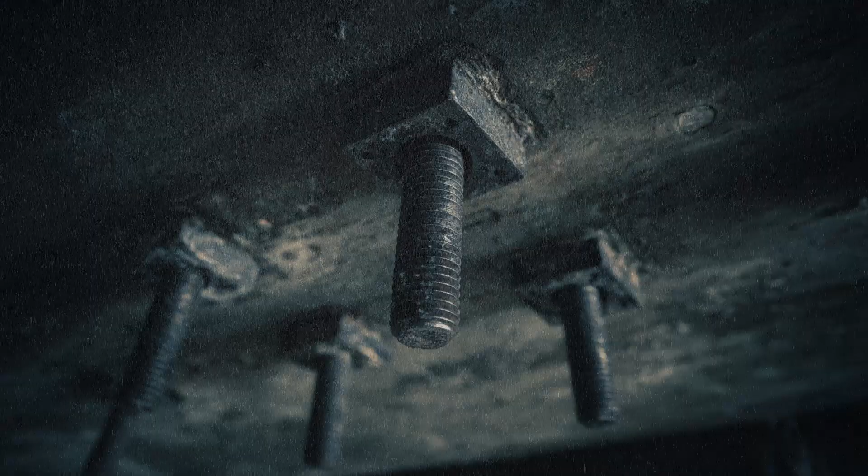On the morning of December 2, 2012, the Sasago Tunnel on Japan's Chuo Expressway was carrying its usual Sunday traffic. Above them hung a ceiling of 270 concrete panels, each weighing 1.2 tons, suspended from the tunnel roof by steel bolts fixed into the concrete with adhesive. 324 tons held in place by chemistry.

The adhesive holding those bolts had not been physically inspected in 12 years. At 8:03 a.m., 138 meters of that ceiling came down. 9 people died. This is the story of 324 tons held up by chemistry, and what happens when the chemistry fails.

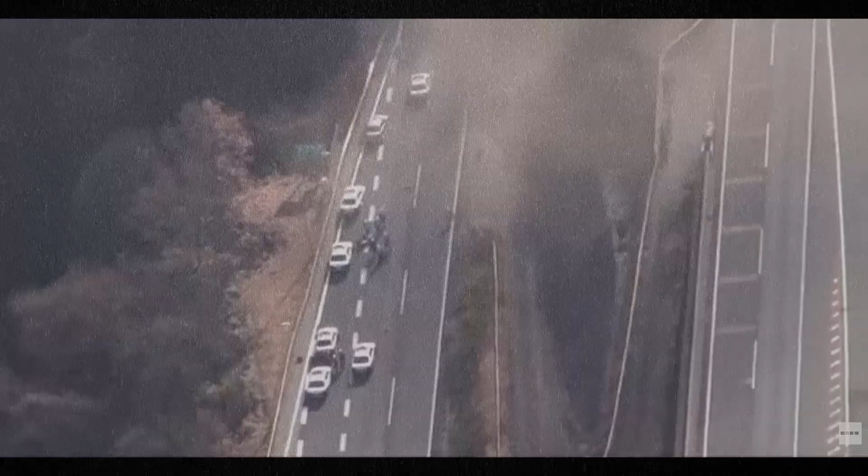This tunnel had a fatal flaw, hiding in plain sight. Let's see how it broke down. The Sasago Tunnel runs for 4.7 kilometers beneath the mountains of Yamanashi Prefecture, west of Tokyo. Opened in 1977, it became one of the most critical links in the Chuo Expressway, the highway connecting the capital to central Japan. On any given day, tens of thousands of vehicles passed through it. It was infrastructure so essential that shutting it down for repairs meant paralysis for Tokyo-bound logistics.

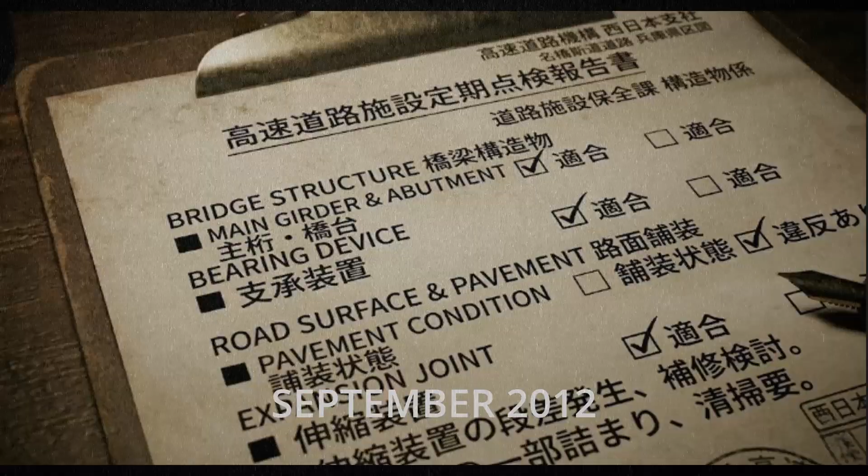The tunnel had passed its most recent detailed inspection just 2 months earlier, in September 2012. Inspectors found no abnormalities. The inspection report was filed, the tunnel remained open, and the adhesive inside the bolt holes continued to dissolve.

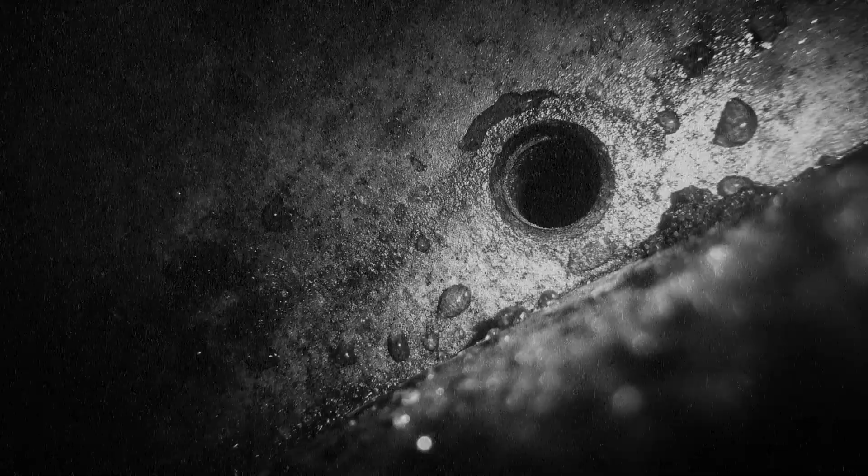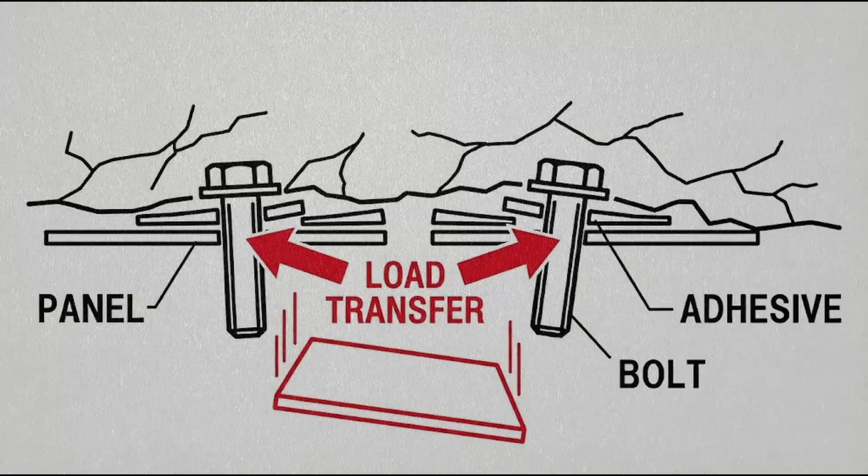At 8:03 a.m. on December 2nd, a single anchor bolt lost its grip on the tunnel roof. The concrete panel it supported, 1.2 tons, dropped 5 meters onto the roadway below. The load that bolt had carried transferred instantly to the neighboring bolts. They were already weakened. They failed. In less than 5 seconds, 270 panels fell.

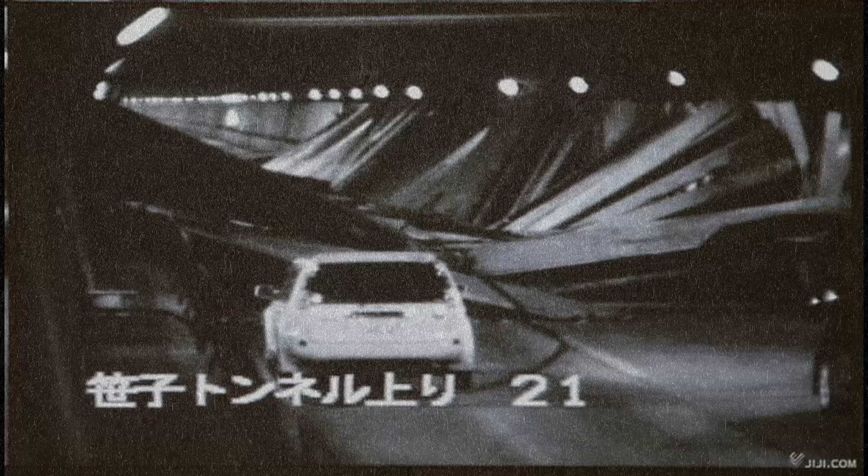138 meters of ceiling became 138 meters of wreckage. 3 vehicles were buried, 1 caught fire. Within 60 seconds, smoke filled the tunnel. But the real question was not what fell. It was why it was still hanging in the first place.

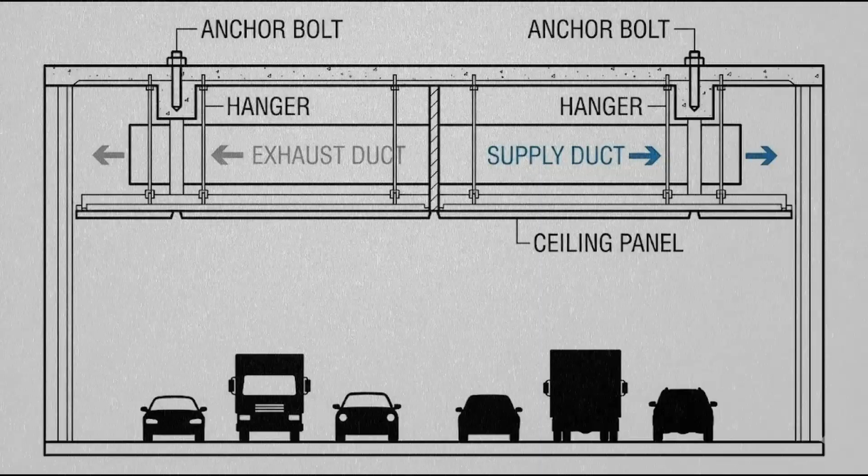The tunnel needed ventilation. Every long tunnel did. In the 1970s, vehicle exhaust standards were far less strict than today, and a 4.7-kilometer tube filled with diesel fumes required a way to move air. The solution was a cross-flow ventilation system, a design that created air ducts by hanging concrete panels from the tunnel ceiling. Clean air flowed through one duct above. Exhaust was pulled through another. It was efficient. It was standard practice. And it required suspending hundreds of tons of concrete overhead permanently.

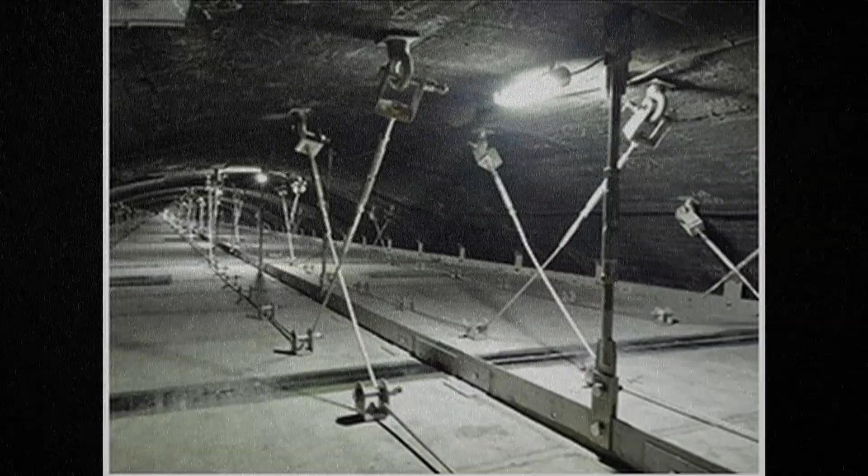The panels were fixed to the tunnel roof by steel bolts. The bolts were anchored into the concrete with a polyester resin adhesive. The design called for each bolt to withstand a pull-out force of 40 kilonewtons. At the time of construction, they did. But polyester resin has a chemical vulnerability. In the presence of moisture, its molecular chains break apart, a process called hydrolysis.

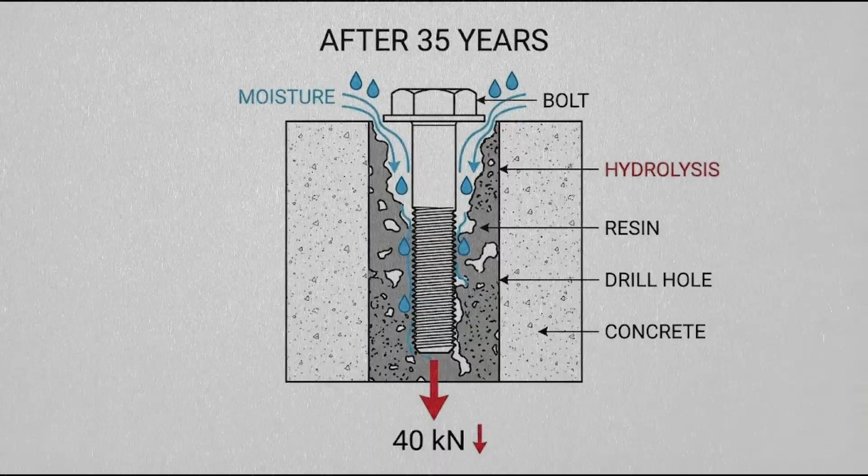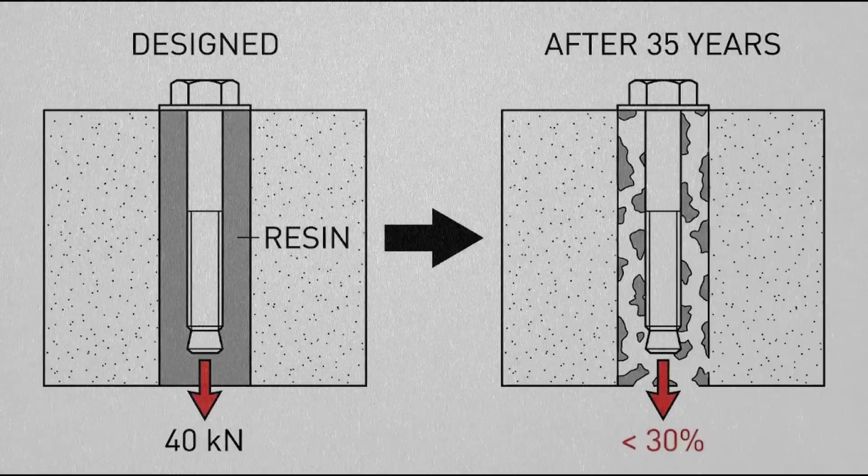The tunnel was a humid environment. Groundwater seeped through the rock above. Condensation formed on every surface. The resin was designed to last. After 35 years, post-accident testing found that some bolts had retained less than 30% of their original holding strength. Some registered 0. They were still in their holes. They were holding nothing. And this was only part of the problem.

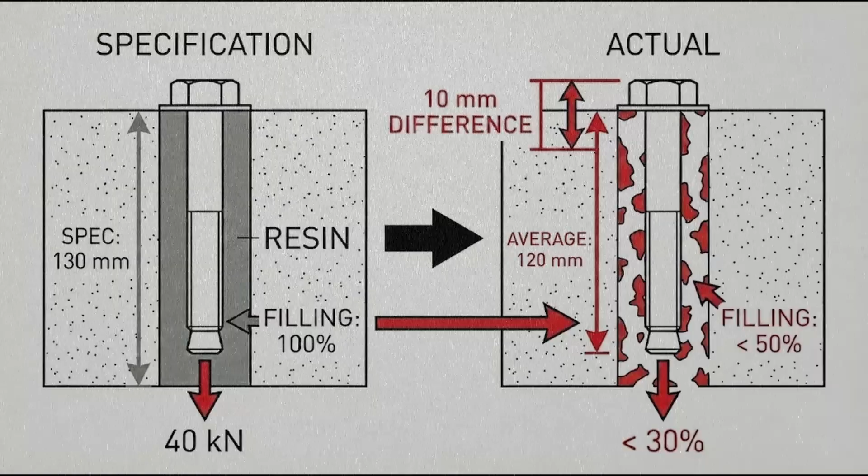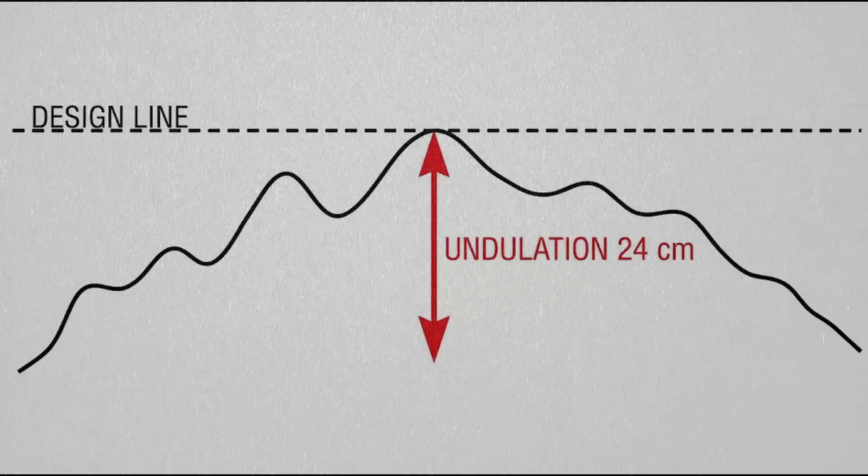The specification called for the adhesive to fill the entire drill hole, 100% coverage. Post-accident core samples revealed fill rates below 50% in some locations. The bolts were embedded to an average depth of 120 millimeters. The specification required 130. The tunnel ceiling was not as smooth as the blueprints assumed. It undulated by as much as 24 centimeters in places, making consistent installation difficult. The designers had trusted the adhesive. The builders had done their best in imperfect conditions. And for 35 years, the structure held.

So the anchor was dying. But a weakened bolt does not, by itself, bring down a ceiling. For that, you need a chain reaction. The ceiling was designed as a continuous structure, panel connected to panel, supported by a shared framework of steel beams hanging from the tunnel roof. There was no redundancy, no secondary support, no failsafe. Engineers call this a single-path structure.

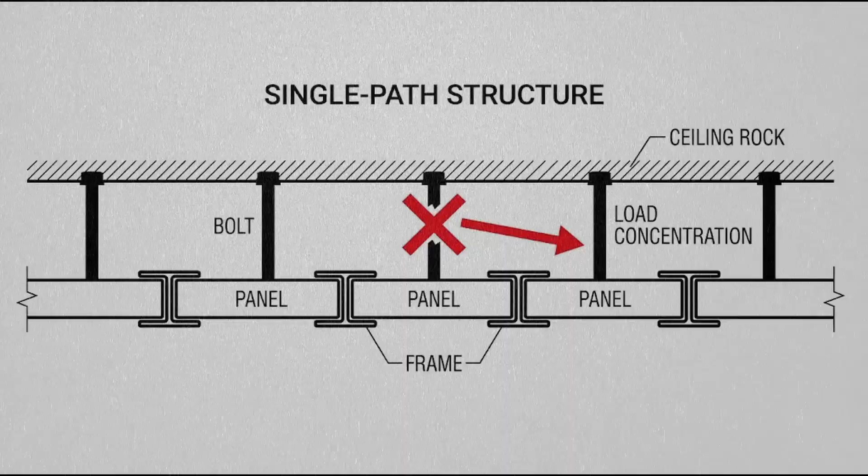If one connection fails, the load does not distribute evenly across the system. It concentrates on the nearest surviving connection. When one bolt pulled free, the load on its neighbor doubled. The safety factor built into the original design was 3, but the adhesive had already lost 70% of its strength. A factor of 3 means nothing when the material can barely hold its own weight.

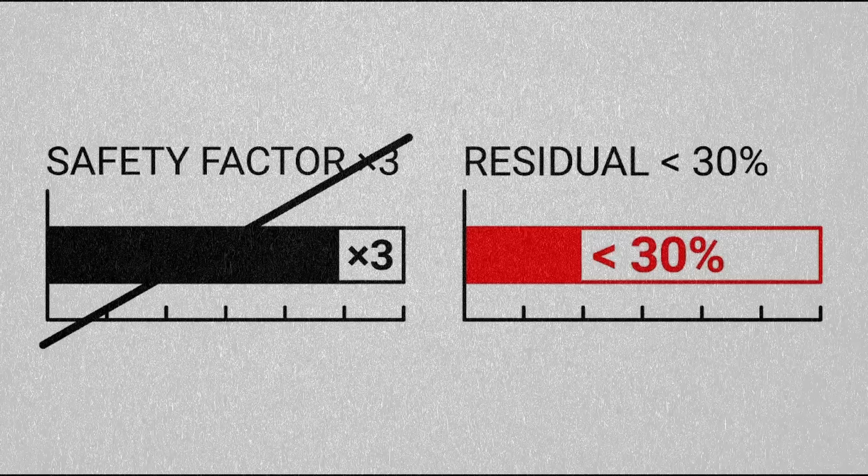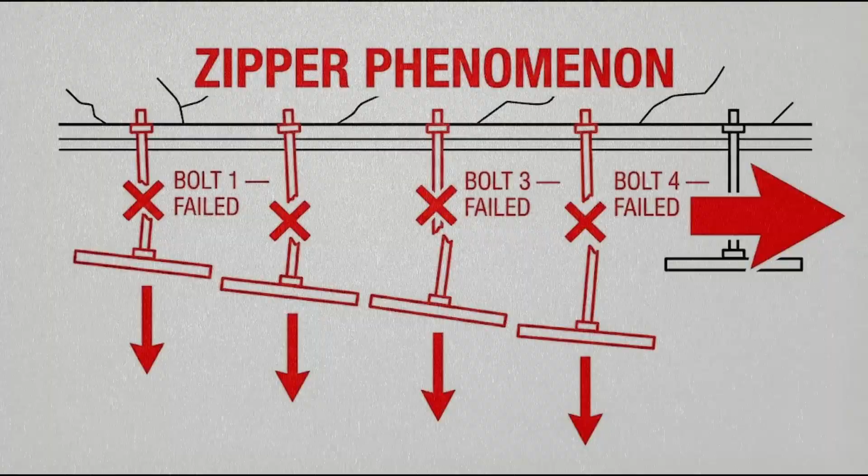The first bolt failed. Its load shifted to the next. That bolt, already degraded, could not absorb twice the design load. It failed. And the next, and the next. Investigators would later call this the zipper phenomenon. Like a zipper opening, the ceiling unraveled in a single continuous motion. 270 panels, 324 tons, in under 5 seconds.

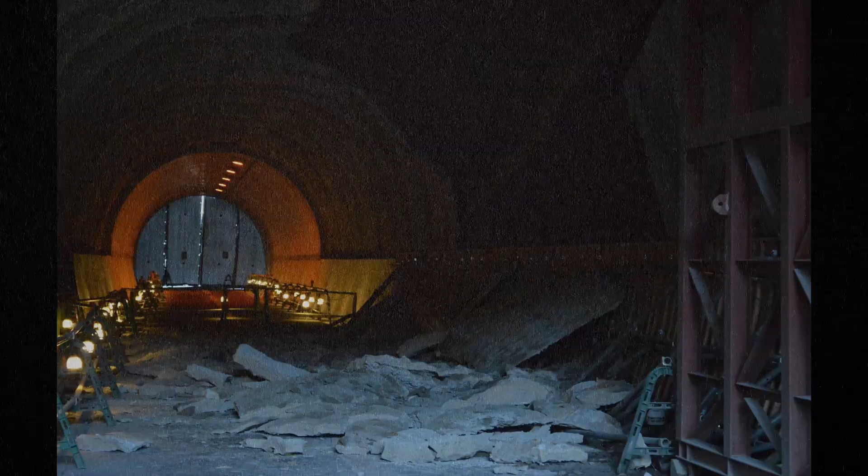So the adhesive failed and the structure had no way to contain it. But even a catastrophic ceiling collapse does not automatically become unsurvivable. What made this one lethal was what happened next. The concrete panels that lined the tunnel ceiling were not cosmetic. They formed the walls of the ventilation ducts, the channels through which fresh air entered and exhaust was removed. When the panels fell, they did not merely crush what was below. They destroyed the ventilation system itself.

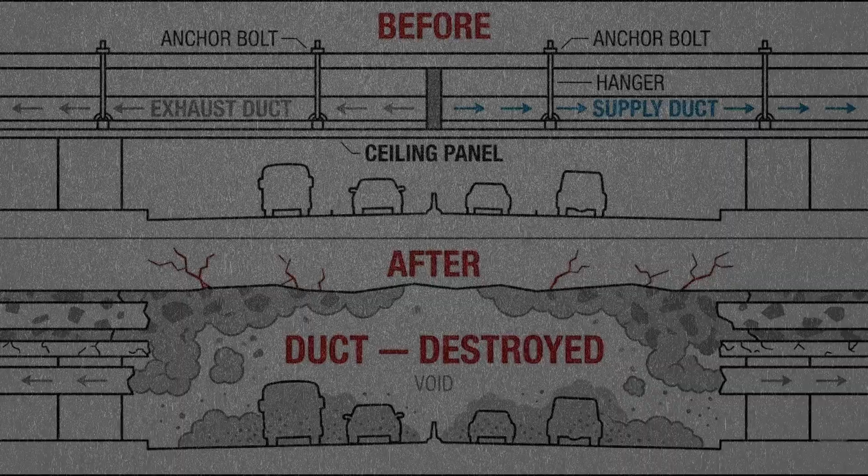One of the 3 buried vehicles caught fire within 30 seconds of impact. Without ventilation, the smoke had nowhere to go. Within 1 minute, visibility inside the tunnel dropped to less than 2 meters. The smoke moved through the tunnel at 2 to 3 meters per second. A person walking through that smoke could manage less than half a meter per second. The smoke was faster than the people. Roughly 70 people were still inside the tunnel when the collapse occurred.

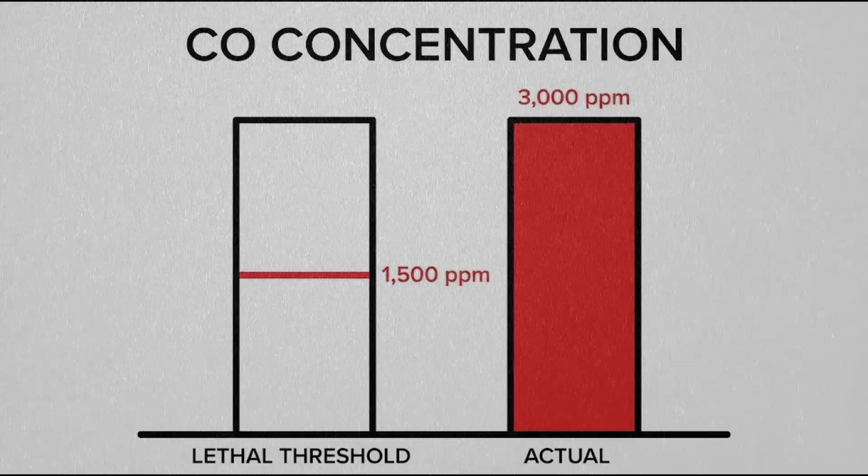Drivers who had been behind the wreckage were now trapped in darkness. The carbon monoxide concentration in the tunnel reached an estimated 3,000 parts per million. The lethal threshold is 1,500. This was double. At those levels, unconsciousness can occur within minutes.

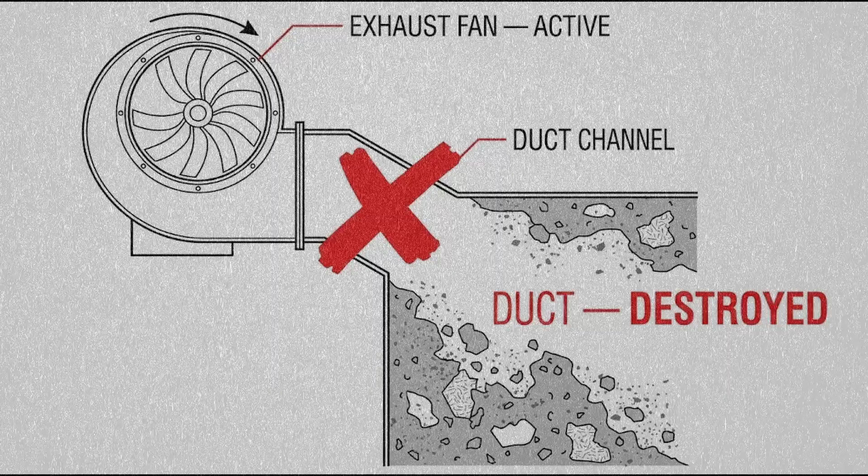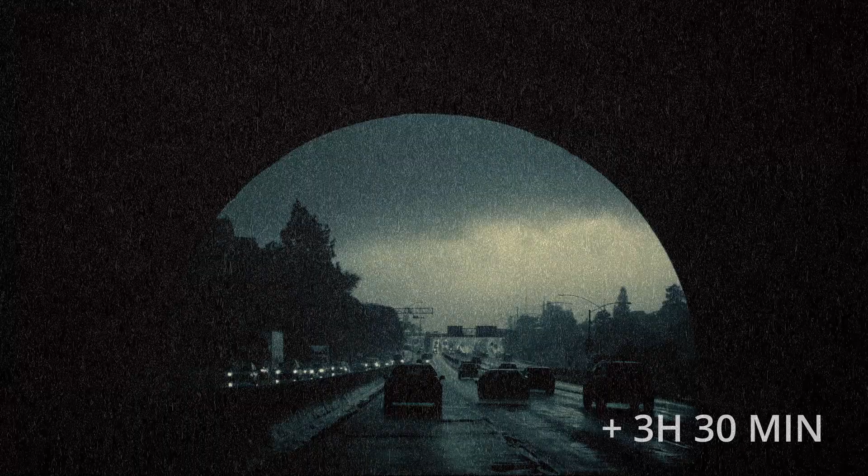Firefighters arrived at the tunnel entrance 11 minutes after the collapse. They could not enter. The smoke was impenetrable, and a second collapse was possible. Monitoring instruments detected millimeter-scale shifts in the remaining ceiling panels. 3.5 hours later, rescue operations were suspended. For the 9 people under the wreckage, it had been over from the first second.

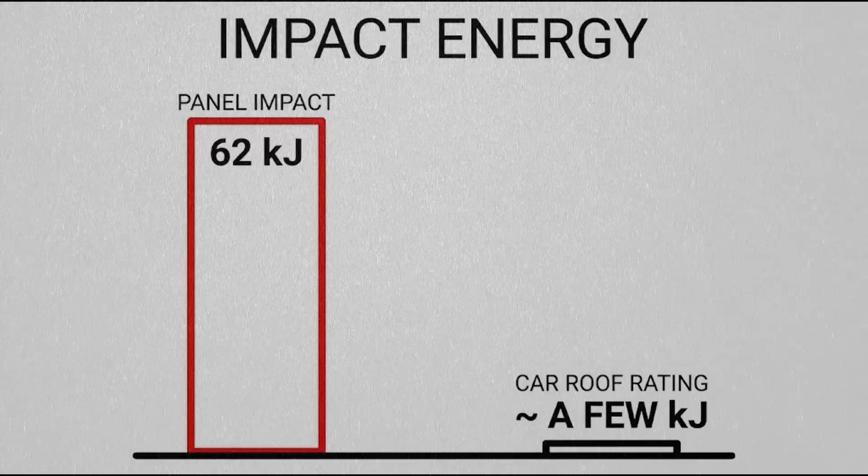The impact energy of a single falling panel was approximately 62 kilojoules. A passenger car roof is rated to withstand single-digit kilojoules. The difference was not close. In the zone directly beneath the collapse, survival rate was 0.

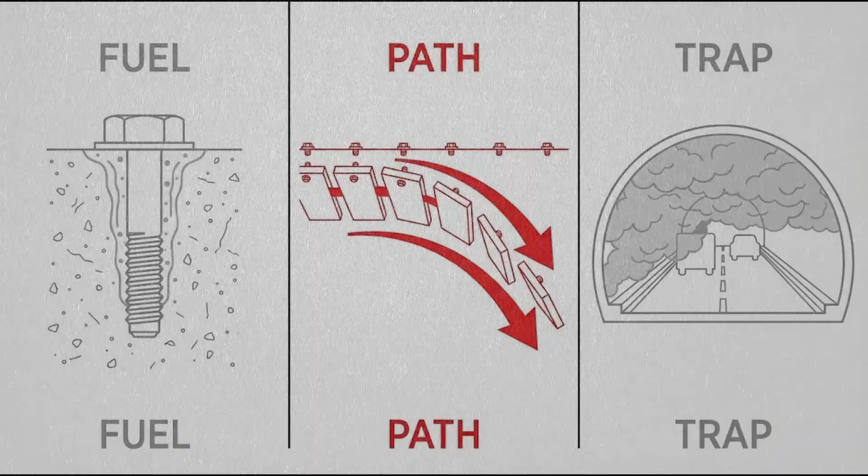The fuel was the adhesive, a polyester resin that had been chemically dissolving for 35 years, reducing bolt strength to less than a third of its design value. The path was the structure, a single chain of panels with no redundancy, where the failure of one bolt doubled the load on the next, unzipping 138 meters of ceiling in under 5 seconds.

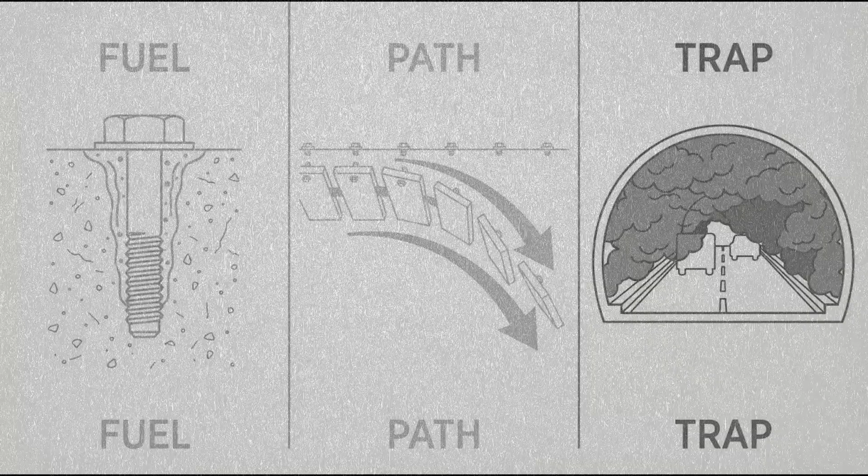The trap was the ceiling itself, the ventilation duct that, once fallen, sealed the tunnel in smoke and carbon monoxide, eliminating every means of escape and rescue. The physics gave them no chance.

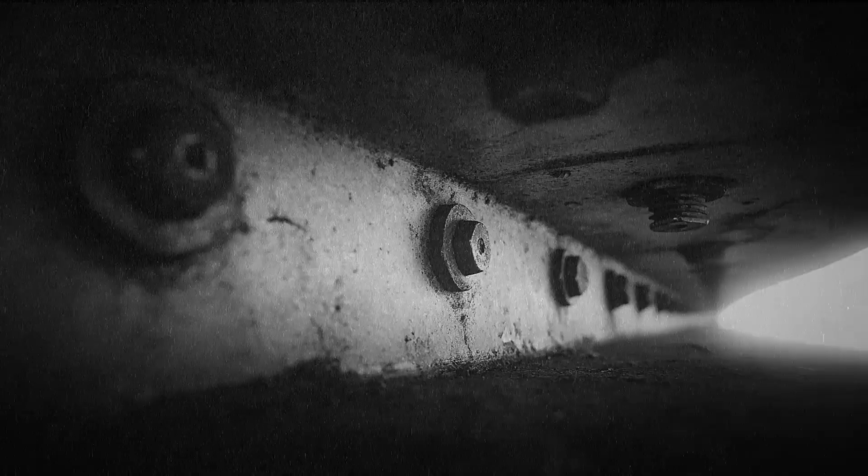The tunnel had passed its inspection 2 months earlier. The September 2012 inspection, the one that found nothing, was conducted from the ground. Inspectors looked up at the ceiling through binoculars. They never climbed to the ceiling to examine the bolts up close. They never touched them. They never struck them with a hammer.

This was permitted. Japan's Road Act, Article 42, required that roads be maintained in good condition. The law used the phrase "shall endeavor," an effort-based obligation, not a mandate. It specified no method, no frequency, and it did not mention ceiling panels at all.

The tunnel's operator, Nexco Central Japan, had been privatized in 2005 as part of a national reform of the country's highway system. The company's management plan, called Challenge 5, set a target of reducing maintenance costs by 30%. The maintenance budget was cut.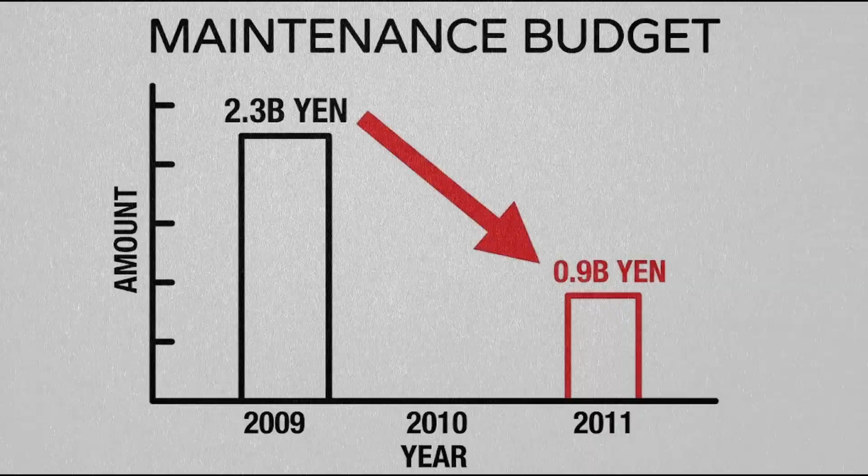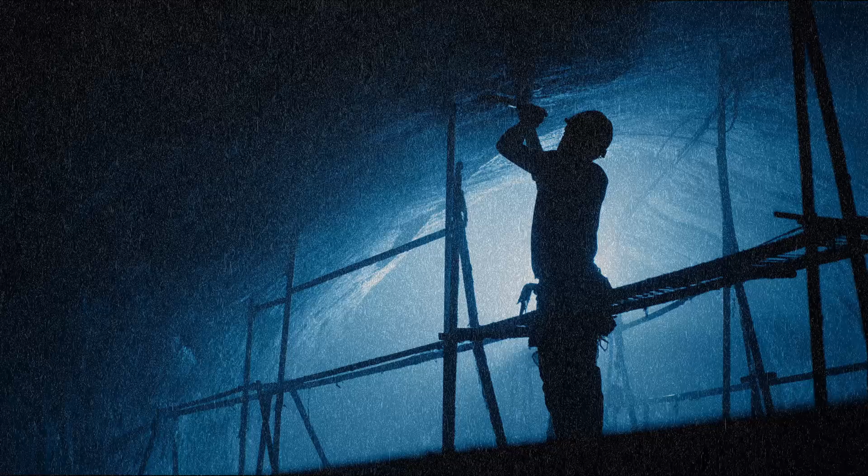Inspection contracts flowed from Nexco to a subsidiary, then to subcontractors below. At one subcontractor, annual revenue from maintenance work dropped from 2.3 billion yen to 900 million yen between 2009 and 2011. The method that could detect bolt degradation was hammering, tapping each bolt and listening for the sound of loose adhesive. Hammering required scaffolding, climbing into the ceiling space, and testing each bolt individually. It was expensive. It was slow.

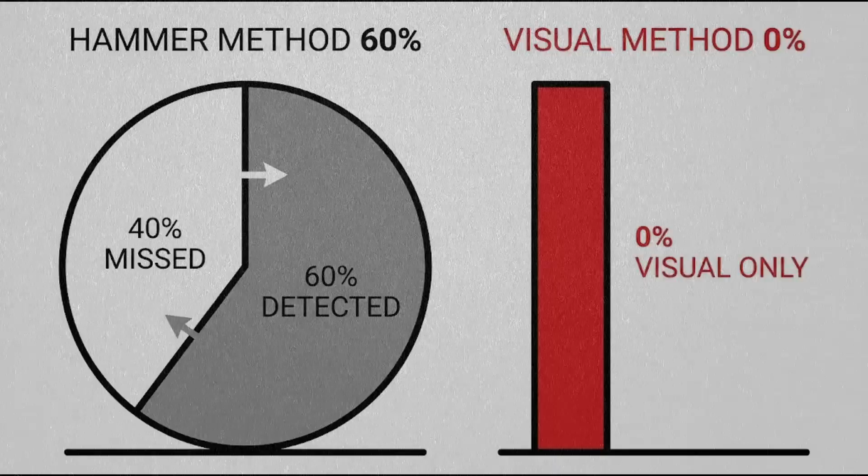It was replaced with distant visual observation, looking up from the road. For 12 years, no one physically touched the bolts that held 324 tons above the highway. Post-accident experiments showed that even skilled inspectors using the hammer method detected abnormalities only about 60% of the time. But 60% was infinitely more than zero.

9 people died. Prosecutors investigated Nexco Central Japan's executives for professional negligence resulting in death. Under Japanese criminal law, conviction requires proving that the accused could have foreseen the specific time and manner of the accident. The prosecution could not establish that any individual executive knew precisely when the ceiling would fall. All 8 suspects were cleared.

The families of the 9 victims sought criminal accountability. They received a civil settlement of approximately 440 million yen. No one went to prison.

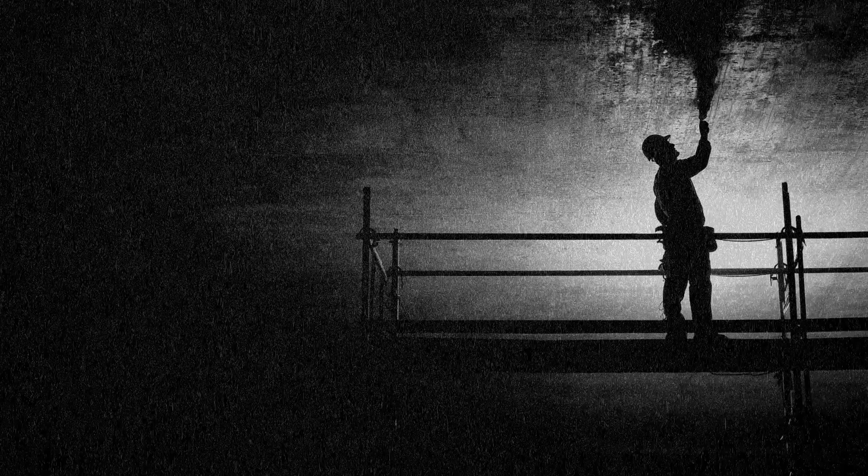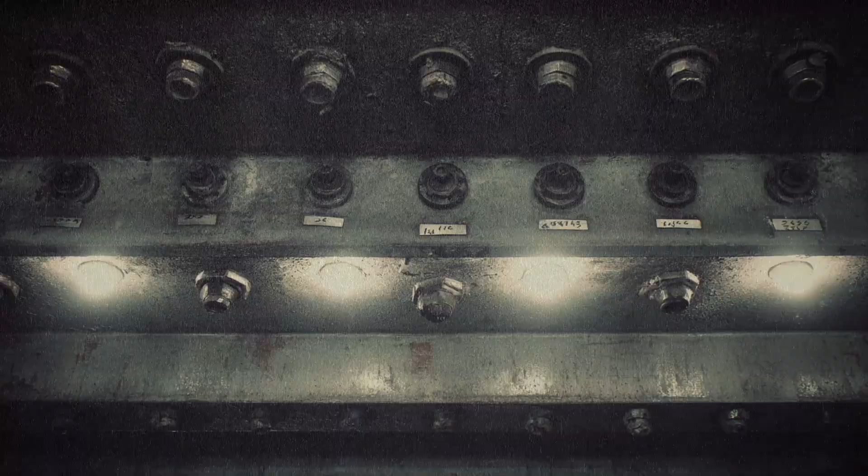In 2014, Japan's Road Act was amended. Before, inspectors could look from a distance. After, close visual inspection became mandatory for all tunnels, every 5 years, no exceptions. Before, ceiling panels and other attachments were a low-priority afterthought. After, every bolt, bracket, and fixture was classified as a mandatory inspection target. Before, each operator set its own grading system. After, a unified national scale, levels 1 through 4, was imposed on every road in the country.

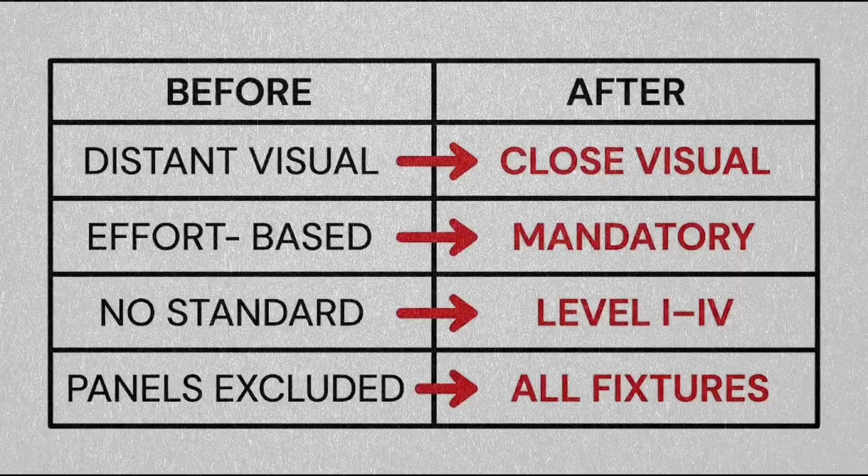Japan now has one of the most rigorous tunnel inspection regimes in the world. Most tunnels with suspended ceilings have since had their panels removed entirely. But the inspection law guarantees diagnosis. It does not guarantee treatment. Across Japan, bridges and tunnels classified as requiring early action number in the tens of thousands. Many belong to rural municipalities with neither the budget nor the engineers to repair them.

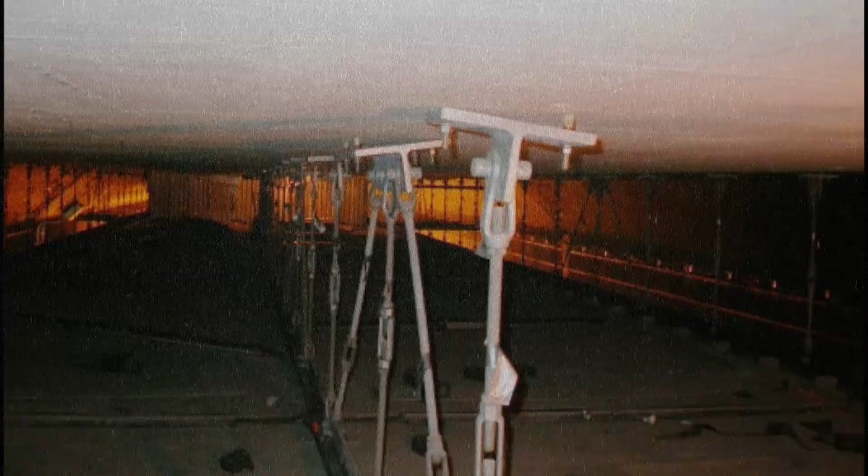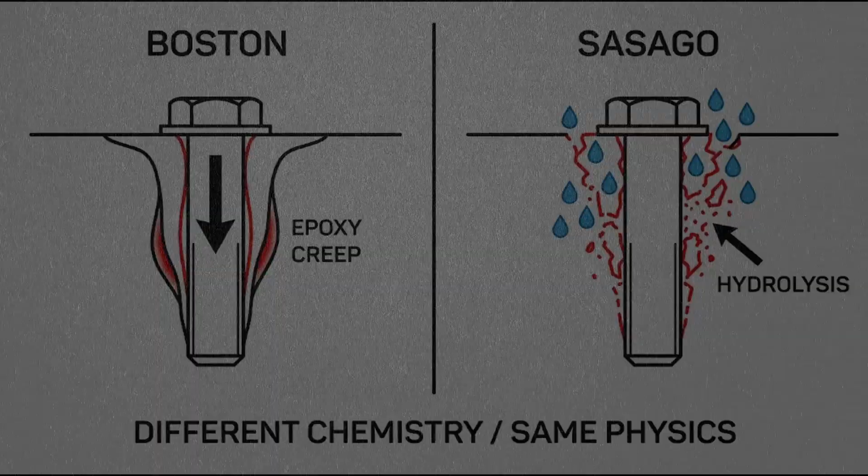6 years before Sasago, a tunnel ceiling in Boston collapsed. Different country, different adhesive, same physics. Concrete panels suspended overhead by steel bolts fixed with epoxy resin, 26 tons that fell onto a moving car. 1 person died. In Boston, the adhesive failed by creep, a slow deformation under sustained load, pulling the bolts free over 7 years. In Sasago, it failed by hydrolysis, water dissolving the resin over 35 years. Both tunnels trusted a polymer to hold concrete overhead indefinitely.

Neither polymer did. After Boston, criminal charges were filed. The settlement exceeded $450 million. After Sasago, all 8 suspects were cleared. The families received a civil settlement.

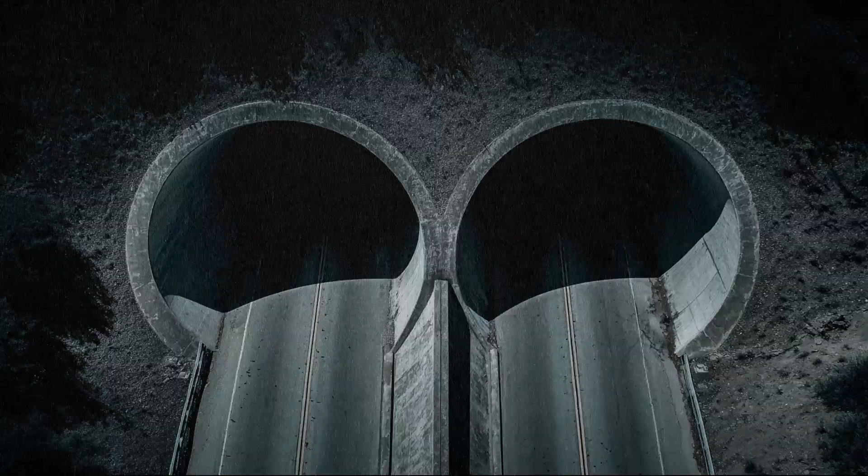The United States enacted federal tunnel inspection standards in 2015. Every tunnel, every 24 months. Japan amended its Road Act in 2014. Close visual inspection every 60 months. The physics was identical. The accountability was not.

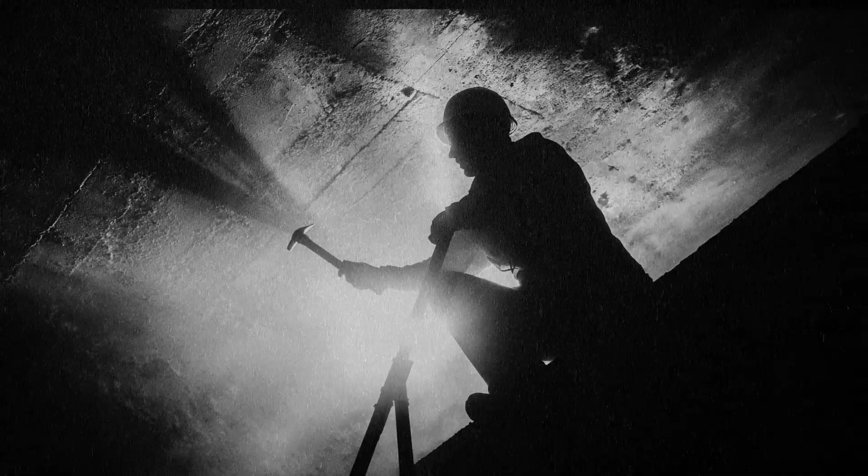Today, the Sasago Tunnel carries traffic again. The ceiling panels are gone, replaced by jet fans that require no suspended structure at all. Across Japan, inspectors now climb into tunnel ceilings with hammers, lights, and checklists mandated by national law. The concrete and the bolts are new. The chemistry is the same.